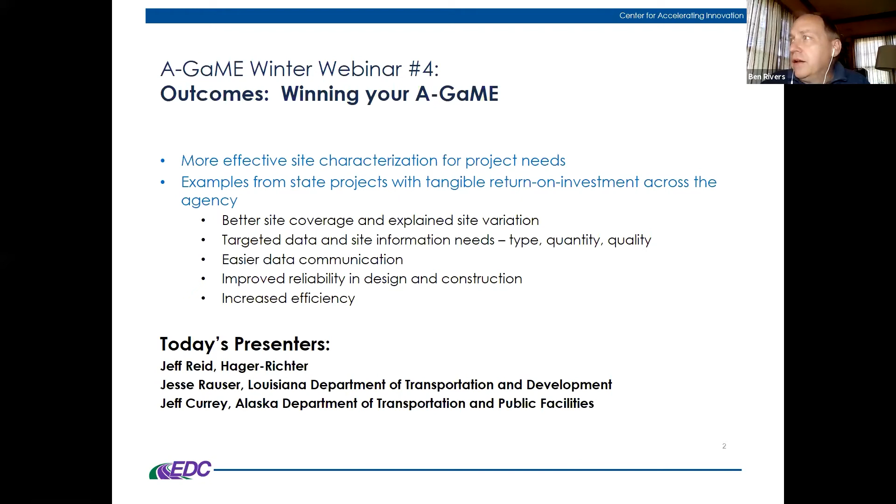Jeff Reid is a geophysicist with Hager Richter. Mr. Reid has over 33 years of experience in the geophysical profession. He's been involved with all aspects of Hager Richter's geophysical project work since the earliest parts of the firm's history. Mr. Reid has acted as lead geophysicist and has led field crews for thousands of surface and borehole geophysical surveys and project fieldwork.

The surveys have included borehole geophysical logging, seismic refraction, reflection surveys, electrical resistivity imaging, gravity, self-potential, very low frequency electromagnetics, ground penetrating radar, magnetics, and electromagnetics. The work typically requires close coordination with engineers, owners, regulators, requiring multiple progress meetings with stakeholders.

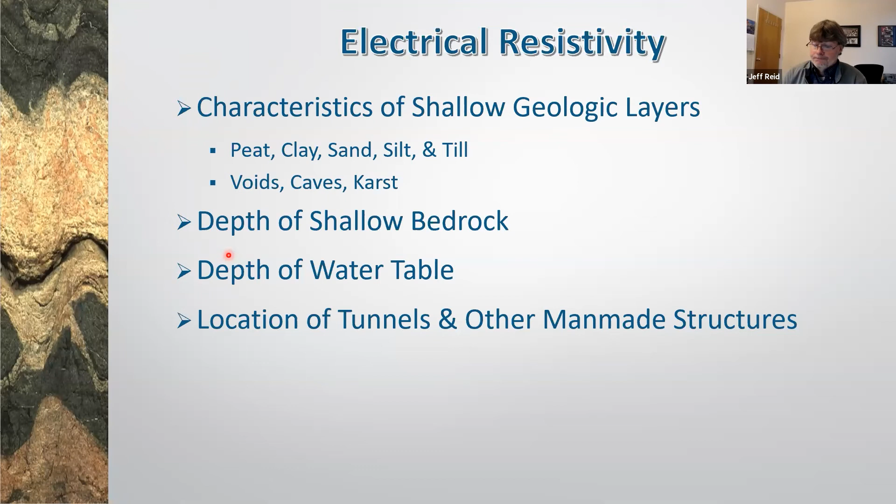Limitations of the method. I think it's very important to understand what the limitations are of each of the methods so that it is used appropriately and in the right site conditions.

Surface conditions can significantly limit the effectiveness of electrical resistivity. Water, snow, ice, vegetation, and uneven ground surfaces can impact the quality of the data and impact where you can acquire data. Subsurface conductive utilities impact the quality of the data. If you are too close to subsurface utilities, you can essentially short circuit the system, and the information you try to use for your interpretation is invalid.

The method relies on contrast in electrical resistivity between your medium and your target. If you have a strong contrast, detection is relatively straightforward. If you have a very weak contrast, detection is difficult. A good example would be trying to identify a very highly resistive bedrock underneath a relatively conductive clay. It's relatively easy to do. Trying to identify a boulder within a dry sand, there's very little contrast between the two, and therefore detection is difficult.

One key with geophysics: detection is not identification. We can detect a lot of features. We cannot necessarily identify what the features are. If we do not have ground control or ground truth through borings, then it's strictly a coarse interpretation. That's why geophysics is typically used to fill in data gaps between borings rather than on its own. It can significantly extend your point data.

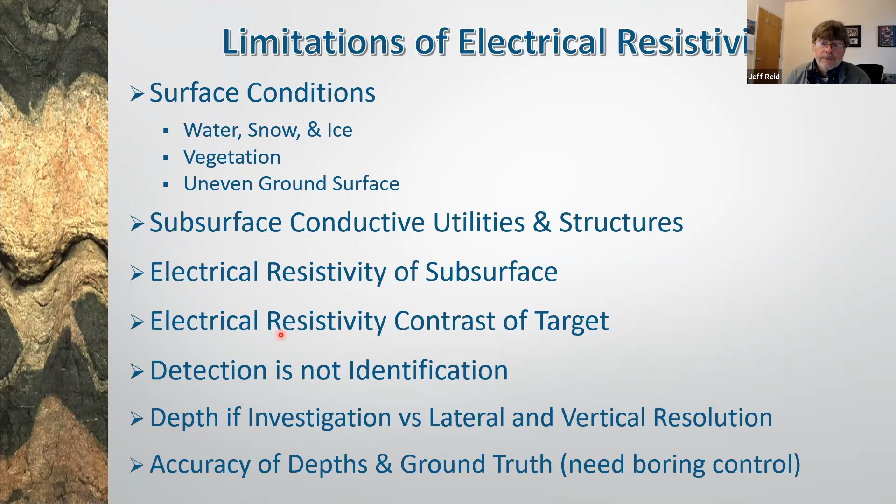Seismic methods: seismic refraction. There are specialized methods: MASW, refraction microtremor, and horizontal to vertical ratio. And borehole methods: parallel seismic and crosshole seismic. For this presentation, I'm only going to discuss refraction, traditional and tomography, and the H/V for the specialized methods. There'll be two webinars next week that will address both seismic methods and electrical methods, so you can get a much more in-depth discussion of those next week.

Seismic refraction is the industry standard for determining the depth and configuration of the bedrock surface. It's the most widely used, and it is the most effective way to do it. You also determine the velocity of the bedrock for rippability surveys, depth of overburden layer interfaces such as till or water table, the velocity of the overburden materials, that's compression wave velocity, and again, depth of water table.

Limitations for refraction: surface obstructions are again a limitation. You need to have access to the area where the data are to be acquired. Ambient seismic noise is a significant limitation, especially for transportation-related projects. There are vehicles, subsurface noise from tunnels, from other structures, from bridge piers that transmit signal down into the ground. These all impact the quality of the seismic refraction data, and we have to find ways around them. Typically, we would work off hours, or you'd have restricted traffic. You try to limit ambient noise so that the noise we're generating for the acquisition is dominant.

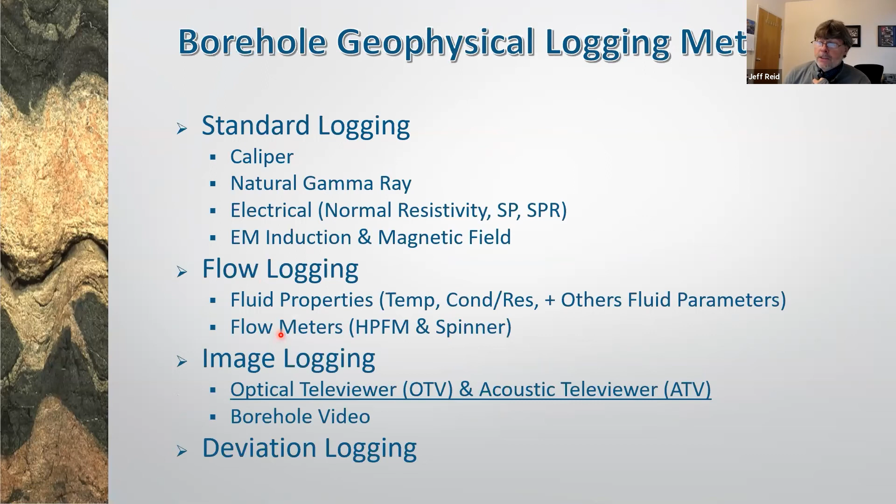ATV and OTV, as they're known, acoustic and optical televiewer logging, are used widely for rock slope stability surveys, for determining the depth and orientations of bedrock fractures, foliations, bedding, your fracture aperture, and changes in lithology in the boring. You're physically imaging the in-situ borehole wall. It's also used for inspection of subsurface structures, quality of concrete, bedrock or concrete, whatever interface you're mating with. It can give you a very good image of that contact, that interface.

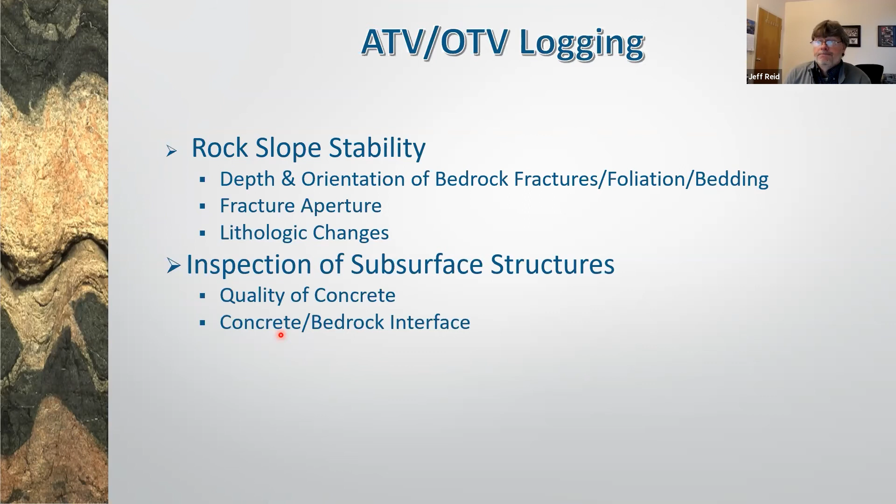Limitations. Obviously, it's a borehole tool that requires an open borehole. For ATV and OTV logging, centralization is key, so we require at least a 3-inch diameter open borehole. ATV can only be acquired in the fluid-filled portion of a borehole. The fluid does not have to be optically clear. It doesn't have to be water. It can be a slurry. It could be oil. It could be water. It doesn't matter. It just has to be in a fluid.

OTV, on the other hand, requires optically clear fluid or an air-filled borehole for acquisition. We always acquire both ATV and OTV because they often complement each other. There may be portions of the borehole that are dry where you can't get acoustic televiewer data. You have the optical data, or you have optically clear fluid for a portion of the borehole and not for the rest of the hole, so the ATV data will take over for that. And you'll see some examples for that as well.

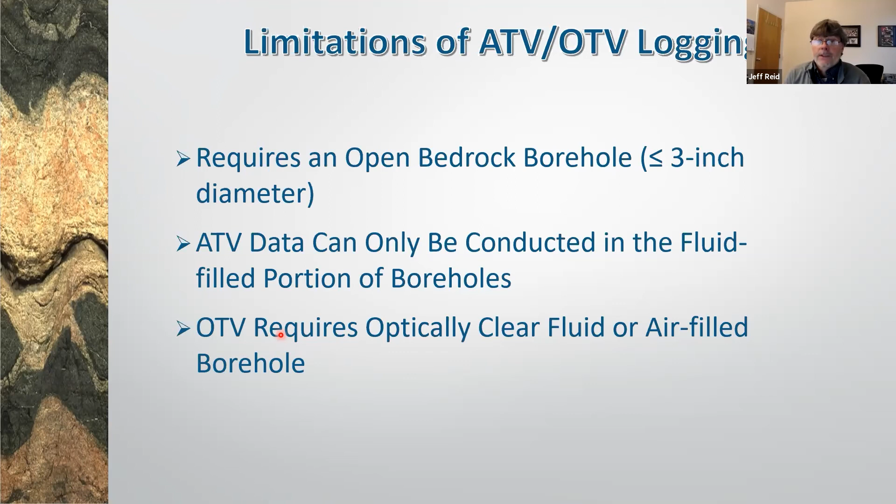By measuring the amplitude or the width of the sinusoid, you get the dip of the anomaly, and by looking at either the peak or the trough location, it gives you the orientation of the plane. The optical and acoustic televiewers have deviation probes built within them so that we know the true orientation of the cylinder. A vertical hole is never vertical. There's always deviation, and it uses that data to properly correct the sinusoidal waves so that we're getting true dip and dip azimuth of the plane as it passes through the borehole.

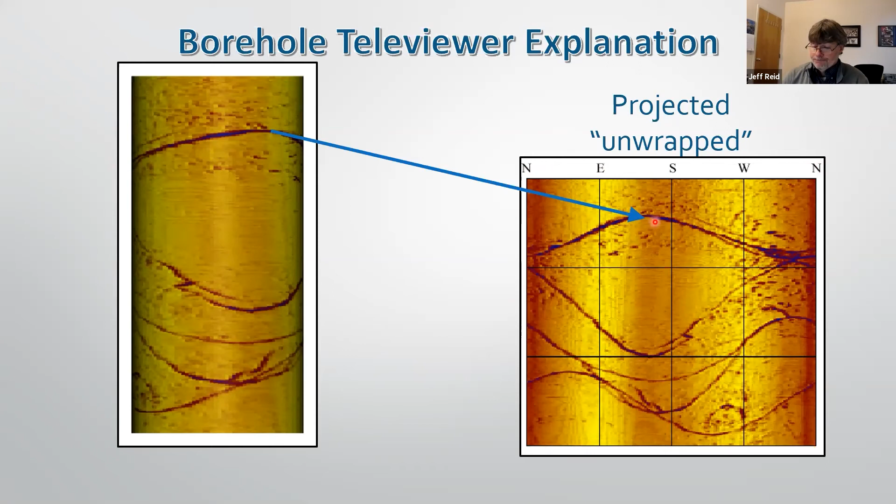Okay, now I've got 3 case studies to go over with you. The first case study is a bridge replacement project in Massachusetts. This was done for the MassDOT bridge program and its representatives. The objectives of the survey were to determine the depth and configuration of the bedrock surface, both at the approaches for the new bridge and in the river for the actual span itself.

They needed wave velocities for soil and bedrock for seismic design, and evaluation of the river floor for the presence of obstruction to construction along the possible alignments. So geophysics here was brought in very early in the project, in the planning stage, even before actual design.

So you're getting the best bang for your buck, the most value, because you're allowing yourself to use the data to actually get yourself to a design stage with more information than you normally would, rather than coming up with a design and then looking at the geophysics to try and confirm it.

The methods that were used in this case were seismic refraction for the land, seismic reflection in the water, bathymetry, side-scan sonar, and magnetics, and passive shear wave velocity testing at the locations of the planned abutments for seismic design. We conducted the land portion of the seismic and the passive shear wave, and we worked with E4 Sciences, who actually acquired the seismic reflection and bathymetry and side-scan sonar.

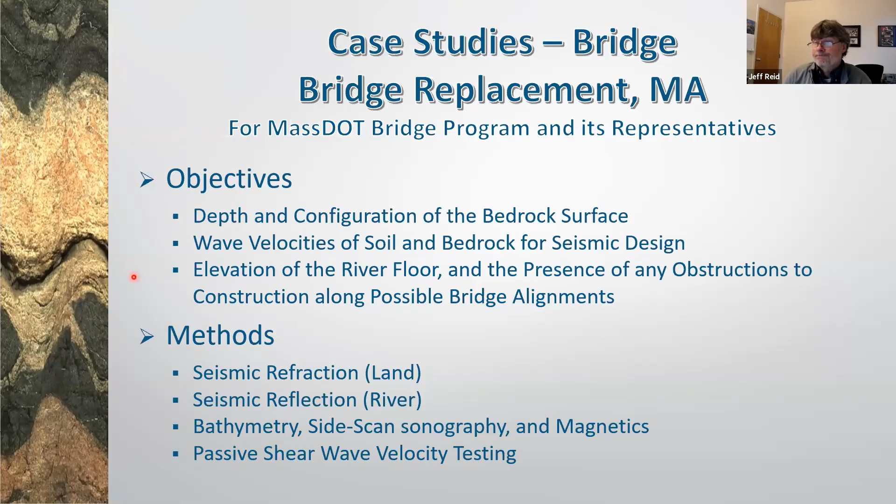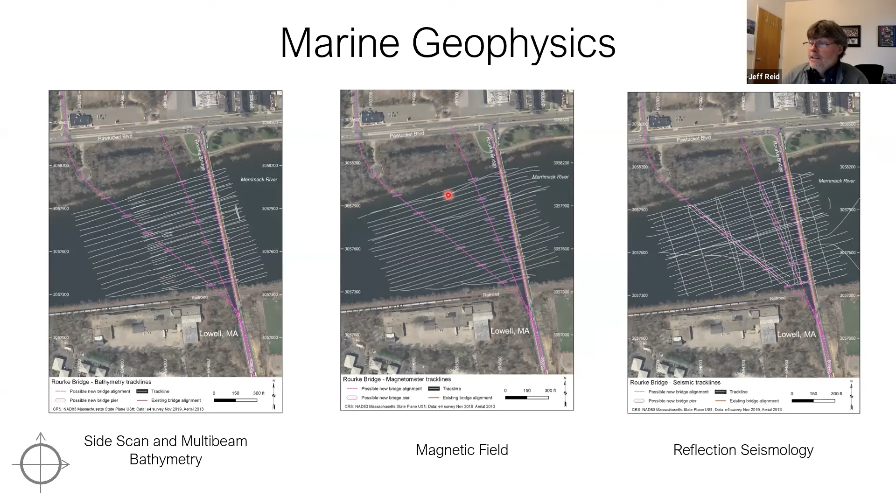This shows basically the data paths for the water-based geophysics or marine geophysics. Each of these are the different scans that were acquired from boats within the river for the side scan, the magnetics, and the reflection seismology. This is a resulting river floor map based on bathymetry and side-scan sonar. These purple lines show the 3 possible bridge paths that the DOT was assessing for the alignments.

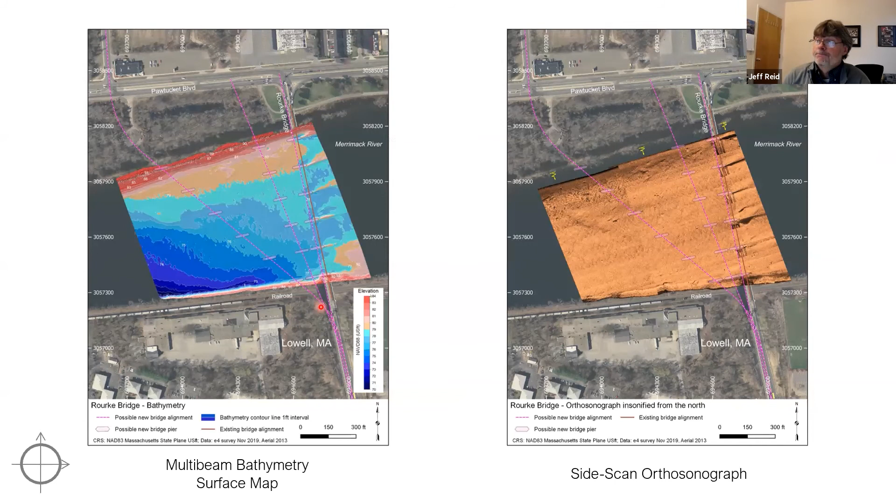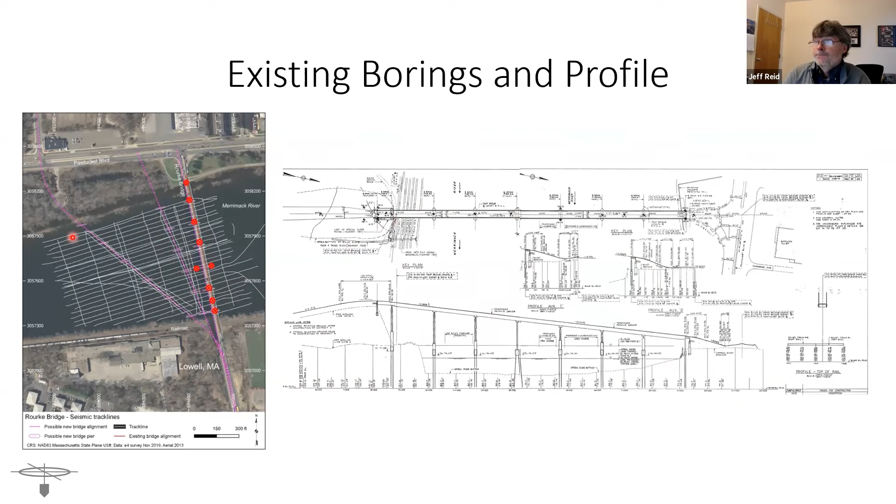The existing bridge was a temporary bridge, it's been there about 40 years, and it's finally being replaced. So we did have some information from the existing installation. The data for those borings were used for calibration, and then that data were extended to the rest of the interpretation, extending that information away from the existing borings by using the geophysics.

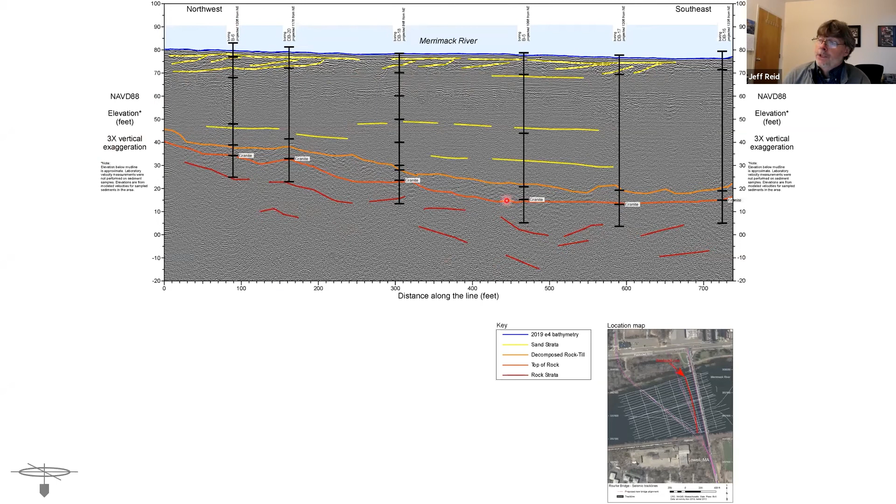This is an example of one of the seismic reflection profiles. You've got the river floor here. You've got mud and other material up above, a till layer, and then the hard granite below that, and even some fracturing within the granite. And these were the borings provided by DOT that were used for calibration and then extended out.

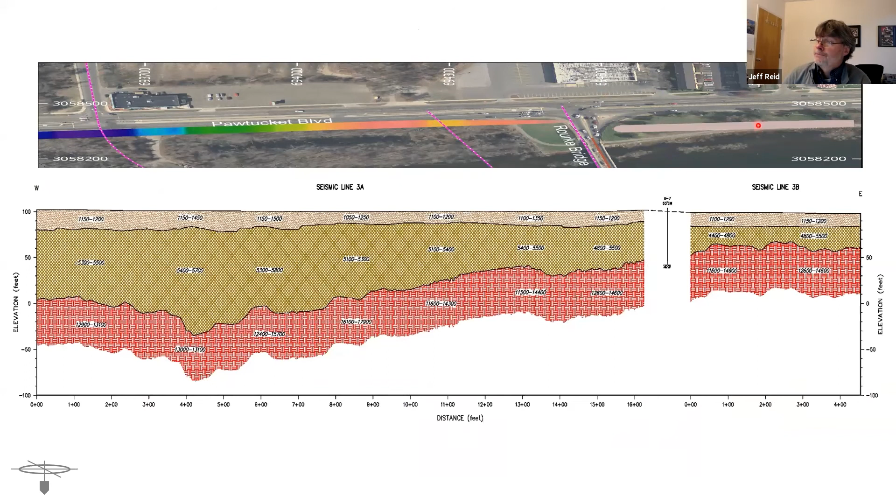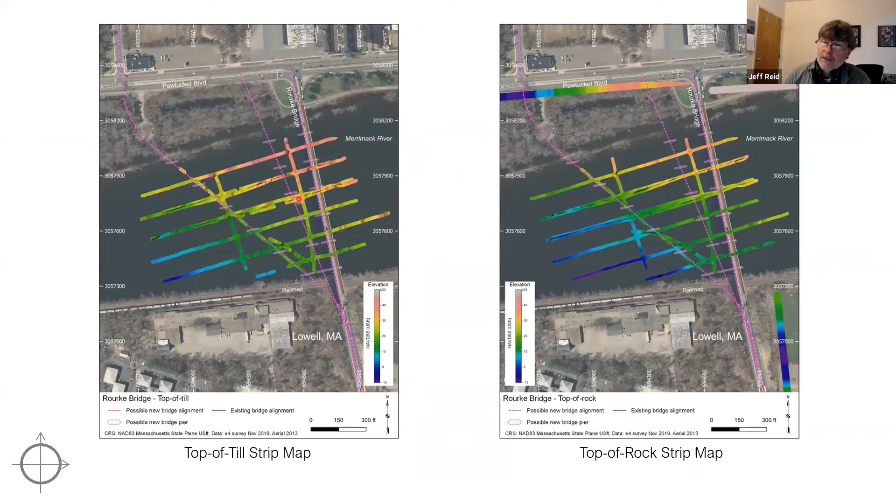And by taking both the surface and water-based geophysics and the depth of bedrock, and in the water portion at least the depth of till, you're able to generate bedrock contour maps. This is a till contour map. This is a bedrock contour map, which helps choose which alignment is most appropriate and most cost-effective for the new bridge.

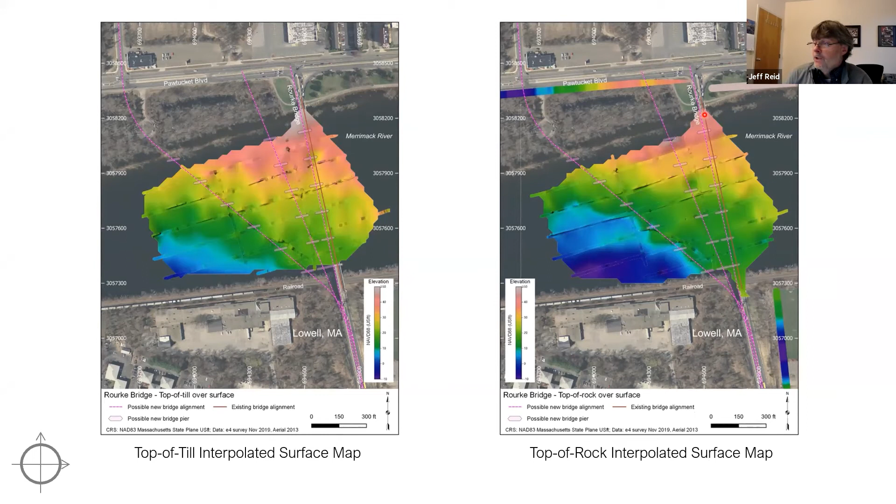Second case study, this is a slope failure on Pennsylvania State Road 87, which is in north central Pennsylvania. This was for PennDOT District 3 and its representatives. The objective of the surveys was to determine the depth and configuration of the bedrock surface, both above the existing roadway and below the existing roadway where the slope mitigation was going to happen, and to detect a possible bedrock shear zone that bisects the failed slope based on observations from outcrops and topography above the existing roadway.

This roadway experienced significant settling and failure after a couple of very heavy rain events a few years back. The existing drainage was working adequately, but it was clear that water was actually moving under the roadway rather than through the drainage system as originally designed. The geophysical survey consisted of seismic refraction tomography, standard seismic as well, and electrical resistivity imaging.

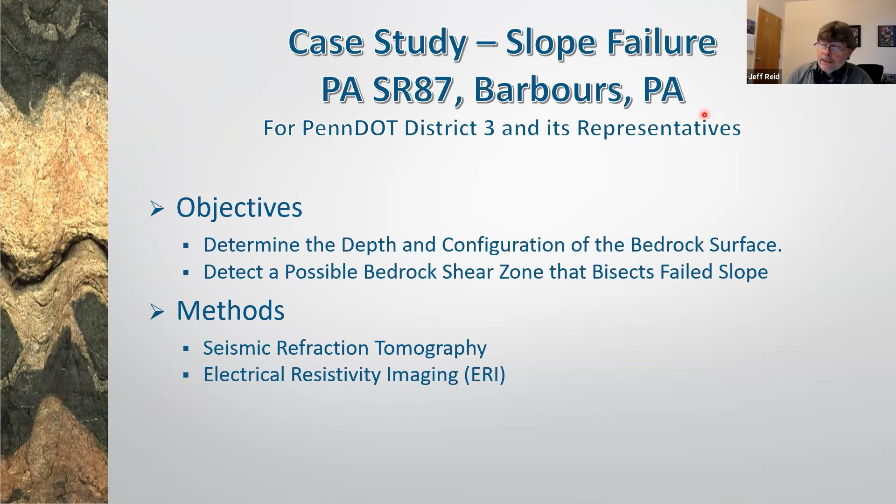Here's the site. So this is a rather large hillside here. You've got a brook down below, so you've got all the water moving under the roadway in this location. It's a site plan. So this is the higher side, this is the lower side, the stream would be down below. And you've got resistivity and seismic refraction along this line, and just seismic refraction along the bottom side. We could not run electrical resistivity down here due to pieces of guardrail and other utilities that would have impacted the quality of the data.

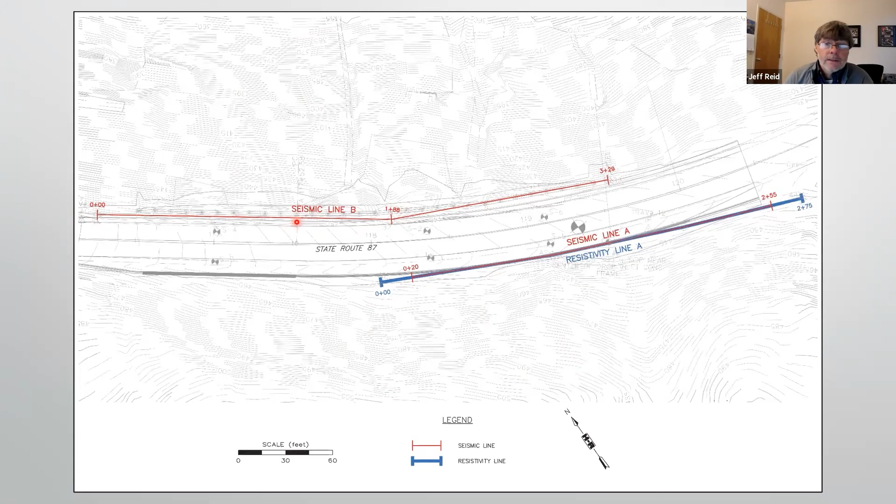Here's a picture of the roadway. So we've got the electrical resistivity imaging set out in this case, the electrodes in the ground here. And you can see the failure on the opposite side of the road here. And this is a view. You can actually see the anticipated shear zone, and there are outcrops up here that were mapped by the geotechnical consultant we were working for and indicated there possibly is a shear zone in this low area. So the electrical resistivity line was actually centered on that feature.

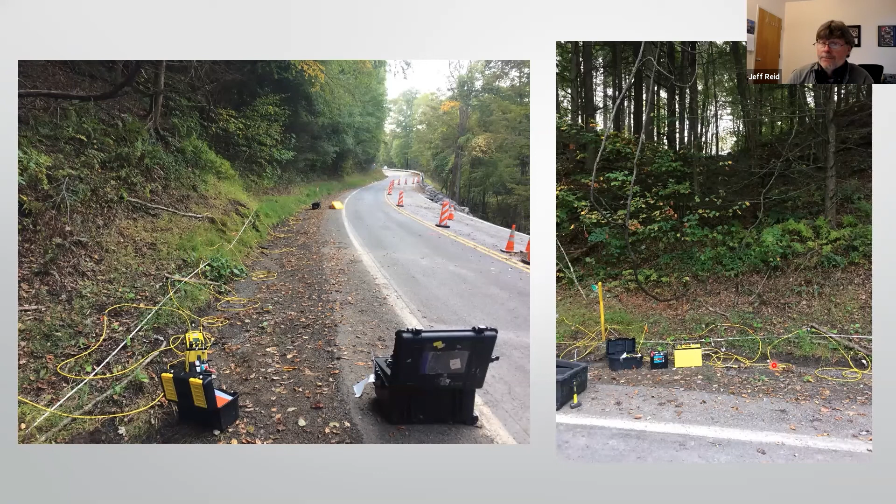This is a surface seismic refraction tomogram. It's tomography. So the varying colors indicate changes in velocity in the subsurface. Blue colors are low velocity, reds and purple colors are high velocity.

The lower plot is the resistivity image. Greens and blues are low resistivity, meaning conductive features. And reds and yellows are high resistivity, meaning resistive features. This particular line was centered on the location of the possible shear zone, which was located off center from this catch basin. They had clay and PVC pipes extending out from the catch basins. They don't negatively impact the data.

Very low resistivity feature just above bedrock on the side of the road. And this is the tomogram. You don't get a significant feature here, but you do get a dip in the bedrock surface and a slight change in the resistivity. I'm sorry, in the compression wave velocity of the bedrock.

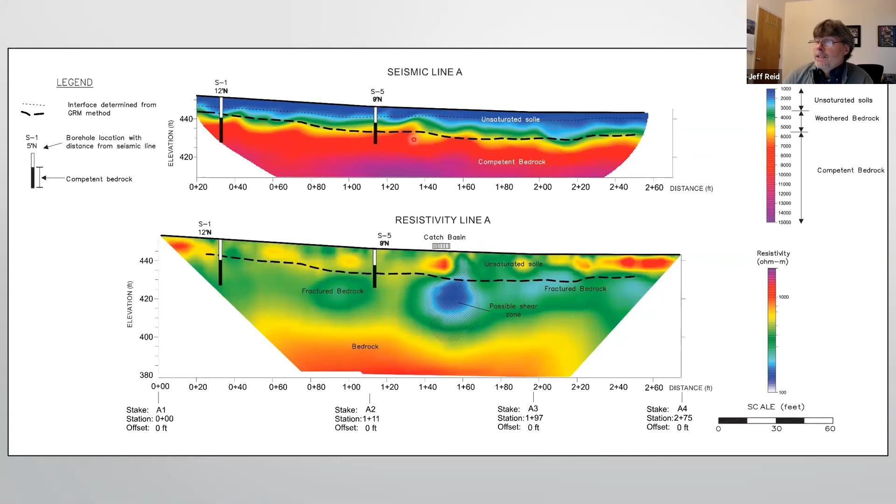This is the view of the seismic refraction on the opposite side of the road. So the refraction lines were actually run in segments that came down in the slope below it. And this is a view of some of the bedrock, very shallow bedrock, which would have been up in this area over here.

And again, this is a seismic refraction tomography. The dashed line on here actually is a standard refraction interpretation. It's called the generalized reciprocal method. So it's a layered interpretation versus a tomogram, which allows you to image and process it as a continuing change in velocity versus depth. The two match very well. And these are the boring logs that indicate depth to rock. And again, you're extending that information between the two models.

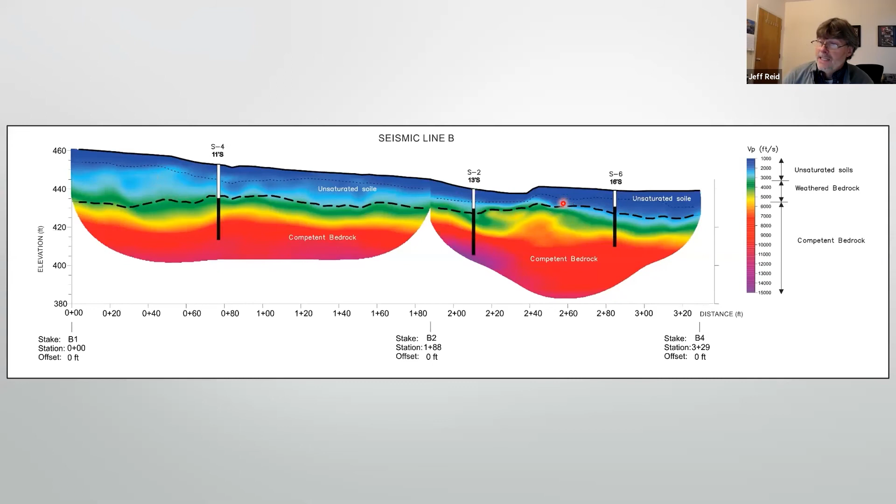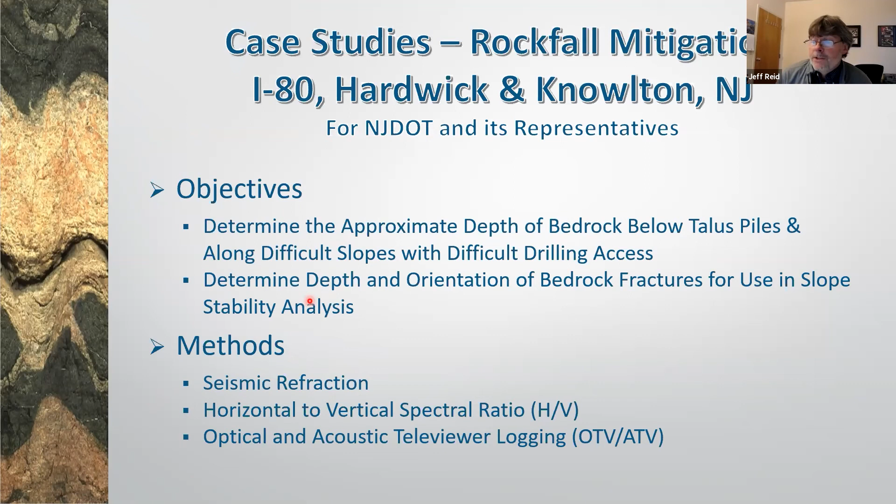Last study. This is a rockfall mitigation project on Interstate 80 in Hardwick, Knowlton, New Jersey. The objectives of the geophysical survey were to determine the approximate depth of bedrock below talus piles and along difficult slopes where drilling was very difficult. You'll see, it'll become obvious in a moment. And to determine the depth and orientation of bedrock fractures for use in the slope stability analysis. So here we use seismic refraction, horizontal to vertical spectral ratio, and optical and acoustic televiewer logging.

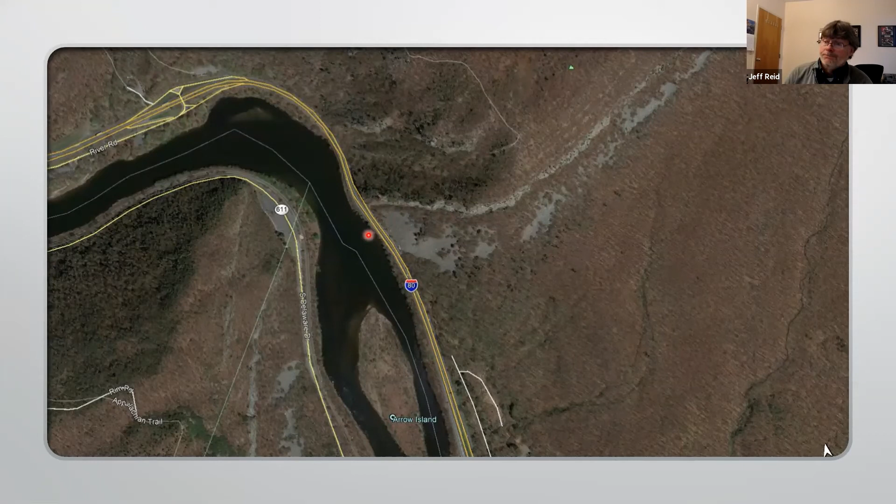Site's located very close to the New Jersey-Pennsylvania border on I-80. There's a significant rock outcrop that occurs right along in here. It extends along the roadway with a significant talus pile below it where rock is coming down off of it. So they're trying to design a mitigation system for these rock falls. This is a view looking to the east from the slope. This huge talus pile from the rock falling from above.

These are the areas where we use the H/V, where it's pretty clear that drilling is not possible, and conventional seismic refraction is not possible in areas with steep, hard talus like this. We did run refraction in the wood lines where we had soil infilling around the talus, where we could acquire good quality data. Obviously, noise is a significant issue when you're working along an interstate highway, and most of the work was done in off hours and at night, and actually with traffic minimized to a single lane to slow it and minimize noise impact to our data.

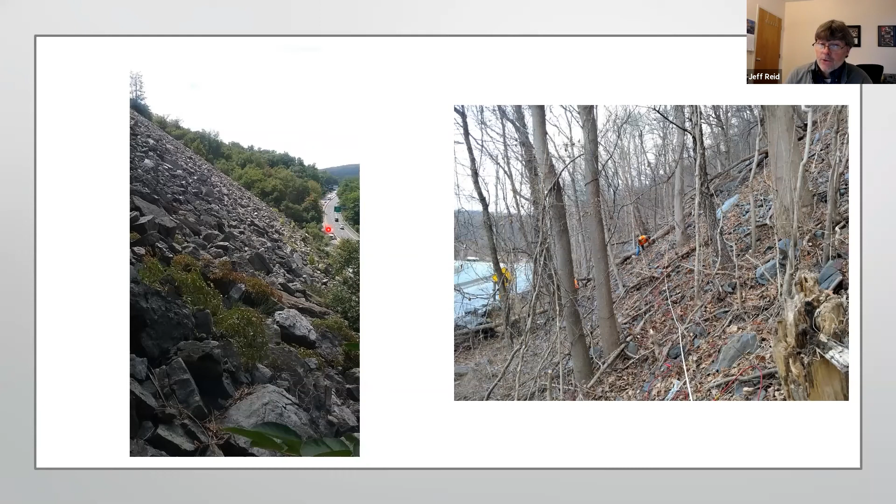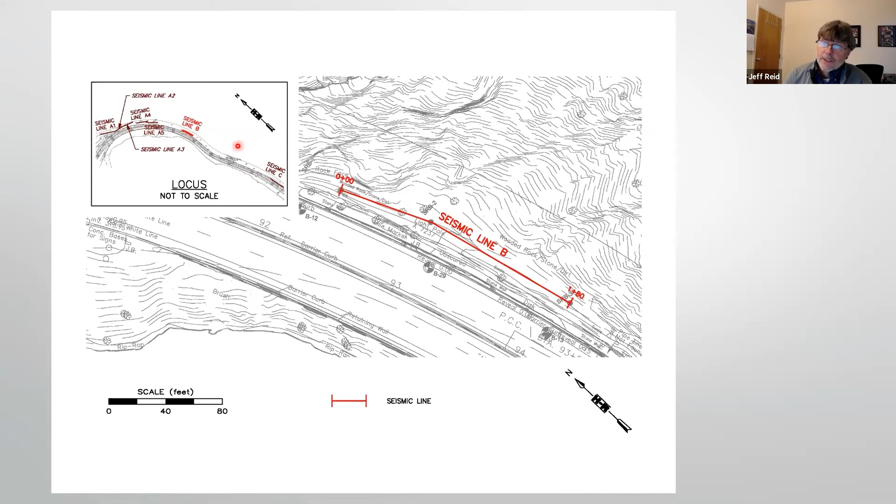This is a blow up of one of the sections. Again, just seismic refraction along areas where we could have access to it. And you can see in the scaled out view, there's significant distance between those lines where we couldn't acquire data. That's where the talus existed, and that's where we did acquire H/V data. Again, very similar to the last profile that we presented. In this case, only GRM, or only a layered interpretation. Simple unsaturated soils over competent bedrock. But this profile then can be used to help design footings for the mitigation.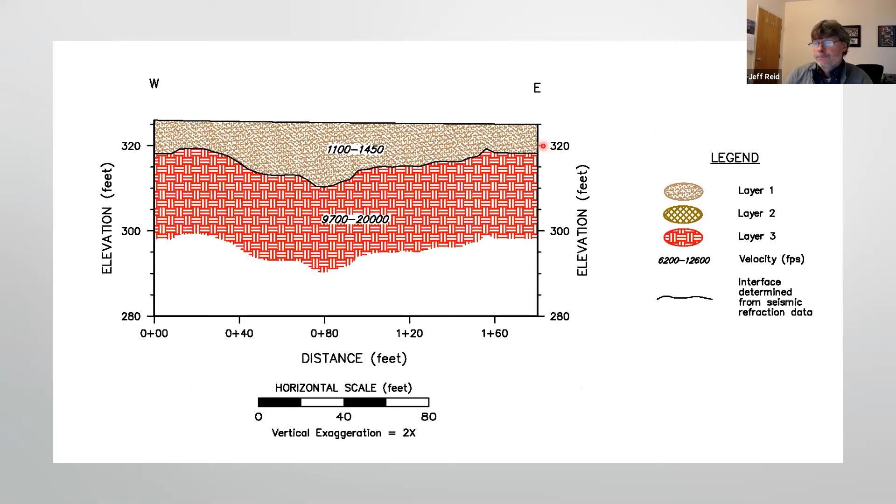In addition, we acquired the H/V, which is about the size of a small shoebox. It gets set down and records data for about 17 to 20 minutes, both the horizontal and vertical components of the seismic waves. We use an inversion scheme to then look at that data and determine a bedrock depth based on the ratio of the two forms of the seismic waves. And it gives us an estimate of the overburden thickness at that location.

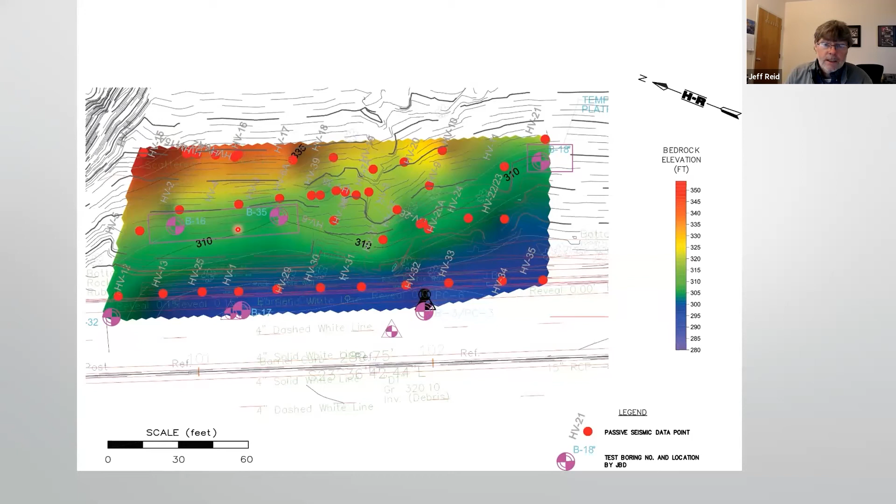In this case, we did it at 44 different locations along the talus pile, and also acquired it at locations where we had known depths of bedrock to calibrate the ratio that we're seeing, and then you apply that equation across all of the data points to generate a bedrock topography map for the area under the talus pile. There's no other way you could generate this without extreme cost for drilling. They did put in some of the borings, as I showed you on the last plot, but you could see how they had to basically build platforms into the talus pile for supporting the drill rig.

We went and acquired acoustic and optical televiewer in all of the boreholes that were installed here. In most cases, we had the equipment hauled up to the top. It's a little hard to carry it up.

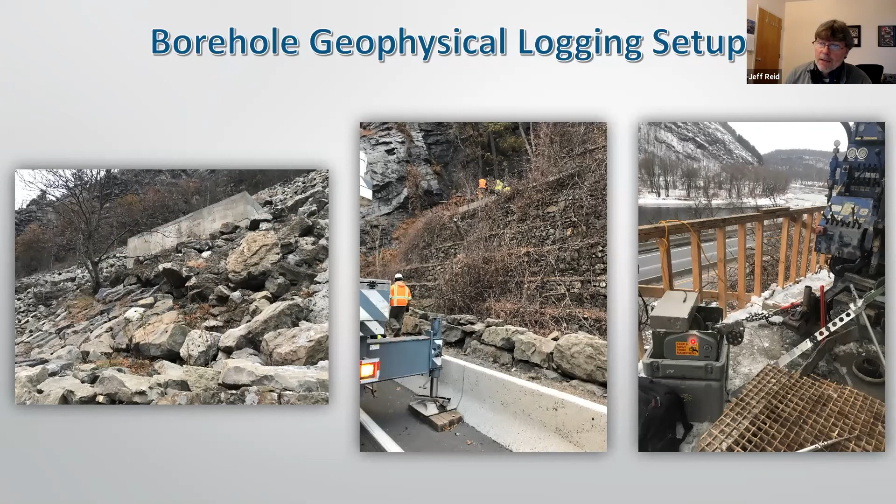And see, these are some of the geophysical borehole logs. So again, you've got the optical televiewer log here. You've got the acoustic amplitude plot here. And you've got the acoustic travel time plot here. This is the caliper plot generated from the acoustic travel time, so it gives you the borehole diameter.

Tadpole structure plots are provided on top of the image. So each one of these individual features is categorized by its fracture rank. Fracture rank 1 would be partially connected around the borehole with no aperture. Fracture rank 2 completely wraps around the borehole, but with minimal aperture. And then fracture rank 3 and 4 both have aperture. Fracture rank 4 has significant aperture.

Then the rewrapped cores here as well. You can see the bottom of the casing in the optical image is set into the rock. In this particular case, the casing was supposed to be extended down to 9 feet. It was over drilled to provide access to the casing to get it down to this position. But you can see the casing got trapped above it, and there's actually a significant gap in the rock above that. Quite often that can pose significant issues for collapsing of the borehole.

And you can decipher in these large zones many significant fractures. The cores for these particular holes were basically coming up in very small chunks. You could imagine that the RQD was poor, as was the recovery. So trying to get an accurate image of the fracture statistics from a core for this site is very difficult. But when you're dealing with an in situ borehole wall, you've removed all of the ambiguity from mechanical versus natural fractures that you'd have in a core, because you are simply looking at the borehole wall.

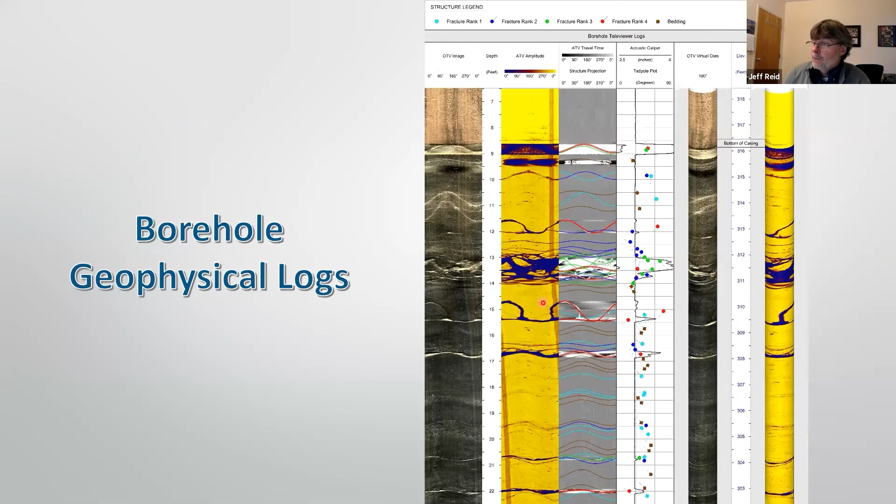That's it from me. So I'm going to hand it back over to Ben, and he can take it from here. Good. Thank you very much, Jeff. That's an awesome presentation. And a great example of a difficult condition where certainly this geophysics fits the bill, in conditions where you just can't drill anywhere. Great example of that. So very good.

So I will let Jesse share his screen while I introduce Jesse Rouser. Jesse is the Assistant Geotechnical Administrator for Louisiana DOTD Geotechnical Group. He has worked with the department for about 10 years and worked in the private sector before that for about 8 years. He graduated from Louisiana State University in 2003 with his bachelor's in civil engineering, and in 2008 he received his master's in geotechnical engineering. His interests include deep foundation design, testing, and data management. With that, Jesse, I'll let you take the floor.

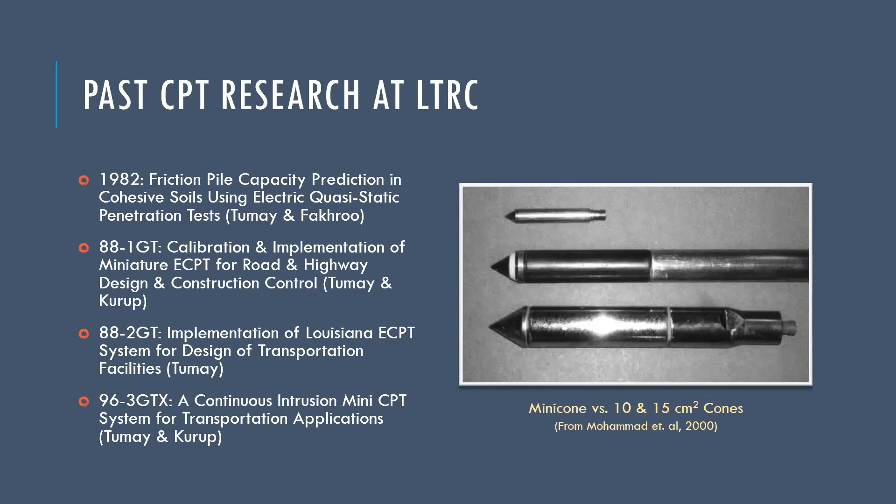And then in the late 80s, Dr. Zhang and Tumay had a research project where they looked at an alternative statistical approach to classifying soils using CPT. Instead of breaking things up into different soil behavior types, it basically split everything into 3 categories, and it was more of a statistical type of approach. So it looked into what's the probability that we have clay, silt, or sand.

And then later on in the 90s, Titi and Abu-Farsakh researched some of the direct pile design methods that were out there. These are methods where you're not converting CPT into intermediate steps. You're basically just using these methods to estimate pile resistance directly from the CPT data. They looked at 8 different methods, and they ended up picking the best 4 for the data set that we had here for Louisiana soils.

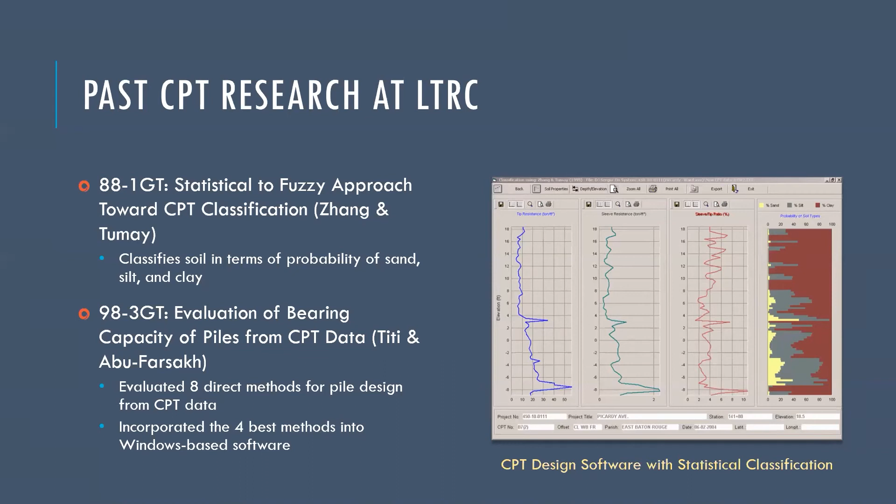Those 4 best methods, along with that statistical classification methodology, were incorporated into a Windows software that could be used to estimate pile resistances. The image here on this slide is just a screenshot from that software, which is kind of the main interface that we use.

After all that research in the 80s and 90s, LTRC transferred their cone rig over to the Geotech group here at DOTD. There wasn't a whole lot of CPT research done after that I'm aware of, but the rig was used here in our group for production work. From what I understand, in general, we didn't really have a section-wide push to use the cone, but certain engineers would use it on their project if it was a personal preference or for very specific applications. And when I came here in 2011, we were mainly using the cone rig to obtain design data for interstate median cable barriers, because we could go out and get a lot of data real quick.

And some of our consultants were still using the LTRC pile design software on their respective LADOTD projects. That software kind of gave us a standardized pile design methodology, sort of like the FHWA DRIVEN. One issue with the software is that it doesn't really take overburden changes into account. Being that most of our projects are bridges with scour concerns, it kind of limited its usage to some degree.

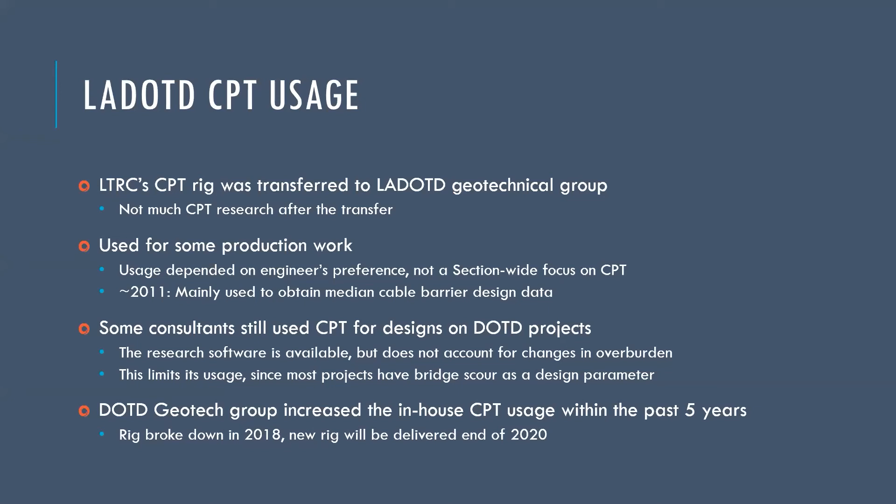I would say within the past 5 years or so, we've tried to increase the use of the in-house rig. But as we started to ramp up, our rig broke down, and it's been down, I think, since about 2018 or early 2019. But we hope to have a new rig delivered here by the end of the year, so we can pick up where we left off and push on with CPT usage.

The project will eventually connect Golden Meadow to Port Fourchon and the LOOP oil facilities with a highway that won't be submerged during major hurricanes. Phase 1 of the project was the southern portion, which consisted of about 8 miles of elevated highway connectors to the existing LA1 that's at grade, and a high-level bridge over Bayou Lafourche. We finished the construction on that in about 2011. And we're right now wrapping up the design on phase 2 that will take things northward to the protection levee in Golden Meadow. Phases 3 and 4 are long-term projects that will ultimately double the capacity of phases 1 and 2.

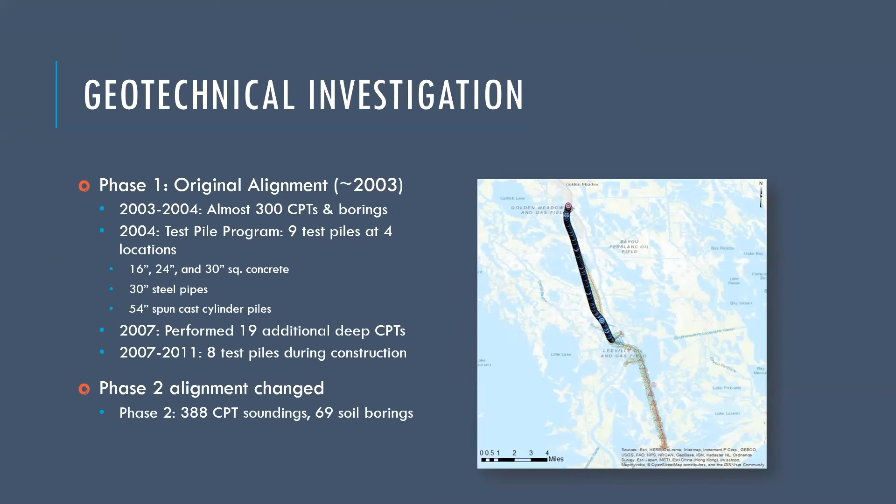And so between 2007 and 2011, we constructed the southern portion of the project, and we tested an additional 8 test piles as part of the ongoing construction. And during all this, at some point, the phase 2 alignment shifted. And so we had to put together an entirely new geotechnical investigation for the northern portion. And that one consisted of about 388 CPTs and 69 soil borings.

The soil profile on the site consists of peat, normally consolidated clay, and some intermittent sand layers. The piles for phase 1 were designed using borings and the FHWA Driven software, but we did look into the direct CPT methods, but I wouldn't say we heavily used those for the design. This was all pre-LRFD. We used a factor of safety of 2, and then we tested 1 pile on each bent. And then for phase 1, ultimately, we tested about 500 monitor piles and used CAPWAP signal matching for all the pile acceptance.

So the reason I'm telling you all this stuff about soil profiles and test piles for a presentation about A-GaME is that for phase 2, we wanted to know, do we have enough data and confidence to design hundreds of pile bents using just the direct CPT methods. And keep in mind, a lot of these soils are really soft, they're difficult to test. So the cone is probably at least a more repeatable means of getting soil information if you trust the direct design methods. And we did a lot more dense geotech investigation for phase 2, which you can kind of see here in this image.

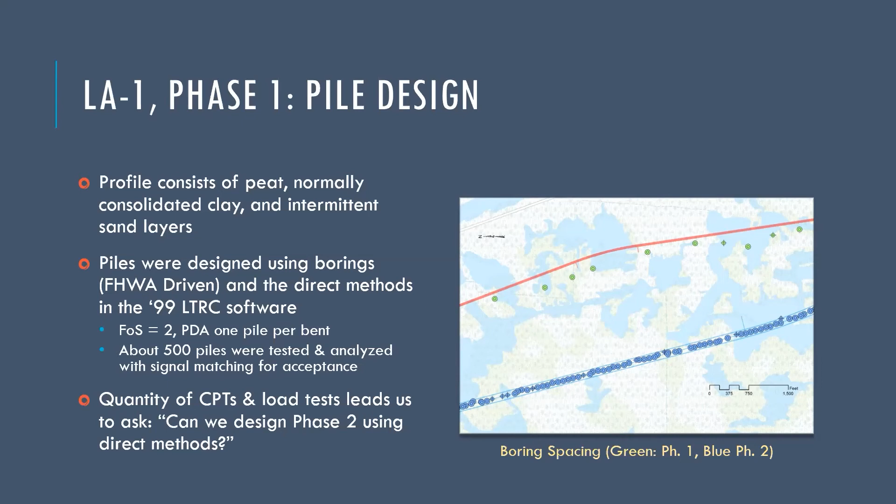It gives us the ability to pretty much have a representative CPT at every single pile bent instead of having to try to make composite soil profiles from multiple borings and multiple CPTs. And so before designing phase 2, I started comparing the results of the static load tests to the direct CPT methods. And for the comparisons, I broke things down into 3 categories. I had static load tests that were successful, in other words, where we failed the pile, load tests where the pile did not fail, and force pulse rapid testing on some of the larger 54-inch piles.

And since we sometimes had multiple CPTs near each test pile, I used the pile driving logs to try to select the most representative sounding for each location. And also because the borings and the cones were taken from airboats, there's a little uncertainty in terms of what constitutes the top elevation of each sounding. So due to the strength disparity between the sand and the clay layers, I really had to make sure that I selected a CPT sounding where the sand layers lined up pretty favorably with the increased resistance in the drive logs, because I wanted to make sure that if I'm comparing estimates from these methods, that it ends up in the correct layer.

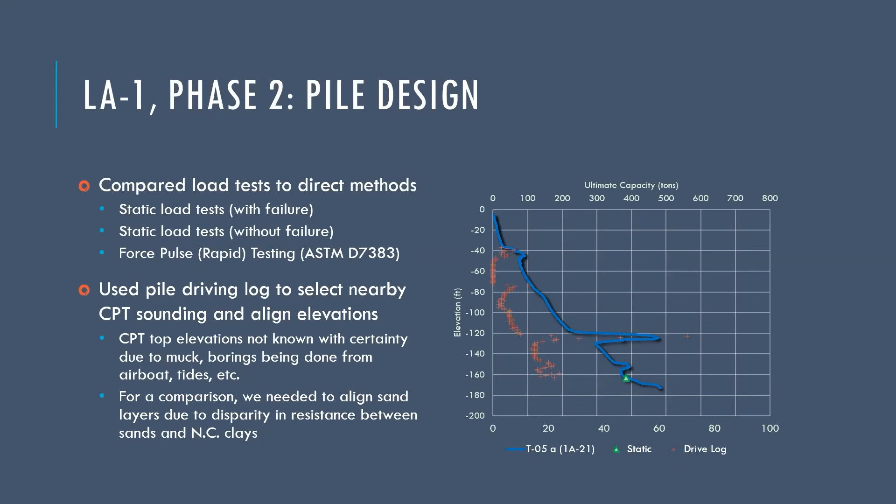And so what you're seeing in the image here is something I did probably at least once for every test pile and then for every CPT design method. The blue line is just the theoretical nominal pile resistance from the direct method. The red plus symbols are the driving resistances from the pile drive log. And the green triangle there is the failure load of the pile plotted at its tip elevation. So, in this particular case, that direct CPT method was dead on. They weren't all this good, but at least it shows that if you have enough data to do the comparisons, you can get a lot of confidence in the CPT.

So the table here is basically just a summary for those 3 categories I mentioned. And I evaluated the quality of the prediction by dividing the predicted resistance from the CPT method by the tested resistance. And what I found is that the direct methods underpredict for the force pulse rapid testing. And I don't want that to be an indictment on the test method itself, because remember, that's the only method we use for the very large 54-inch cylinders. So the design methods may also not scale well to those larger piles.

For tests that didn't exhibit a clear failure load, the CPT direct methods tended to overpredict. That's to be expected though, because that's kind of an incomplete load test. And then for the tests where we failed the pile and had a successful load test, the CPT direct methods actually provide a really good correlation with the static load test. So for our particular site, the Schmertmann method provided the closest estimates, but it provides the highest resistances in sand. And so my concern on this project was that it could overpredict our pile capacities in sand.

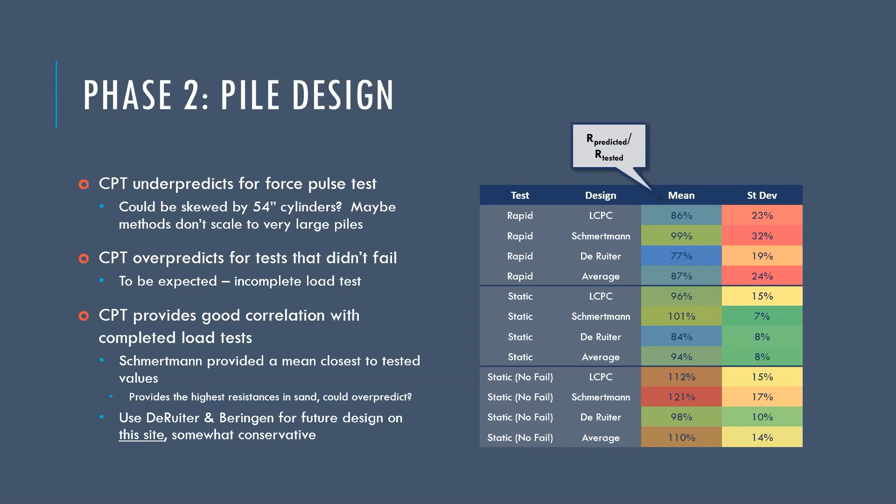So what I ended up doing was selecting the De Ruiter and Beringen method for this particular site, since it appears to be a little bit conservative, but it has a pretty low standard deviation. So kind of the moral of the story here is that we have enough geotechnical investigation and load testing to feel comfortable enough to go ahead and design the entire phase 2, which is another 8 miles, using just CPT direct design methods. And that's what I've done.

I just want to show this here. This is kind of a cool slide that shows, it's supposed to be a fence diagram of the entire phase 2 alignment. And it actually looks like geophysical testing, but all this is the result of just hundreds of CPTs just stacked up alongside of each other. But it's really cool because you can kind of see the sand layers come in and out of the profile as you progress from south to north. So I don't know how well the animation works over the internet, but I've got about 5 of these things like this.

Okay, and then next I want to talk a little bit about a project where we used CPT during construction to troubleshoot some problems. So this project is a bridge widening. It's currently under construction. We used conventional borings for design, and the profile is mainly sand. We do have a stiff to very stiff clay layer between about -35 and -65 feet. There's a good bit of scatter in the N value, so we chose a pretty conservative design profile, and we also used several indicator piles before we ordered our production piles.

And so what you're seeing here in the plot are the N values for the borings that are near the main span, which is going to be supported by 54-inch cylinder piles. So on this project, we recently drove a 54-inch spun cast indicator pile. It was supposed to have a nominal resistance of about 876 tons, but when we tested it with PDA at the end of drive, there was almost no measured resistance, and at the 24-hour restrike, we had only about 200 tons, which was a lot less than we expected. And just looking at the data, it looked like a pile driven into soft clay, so it didn't make sense.

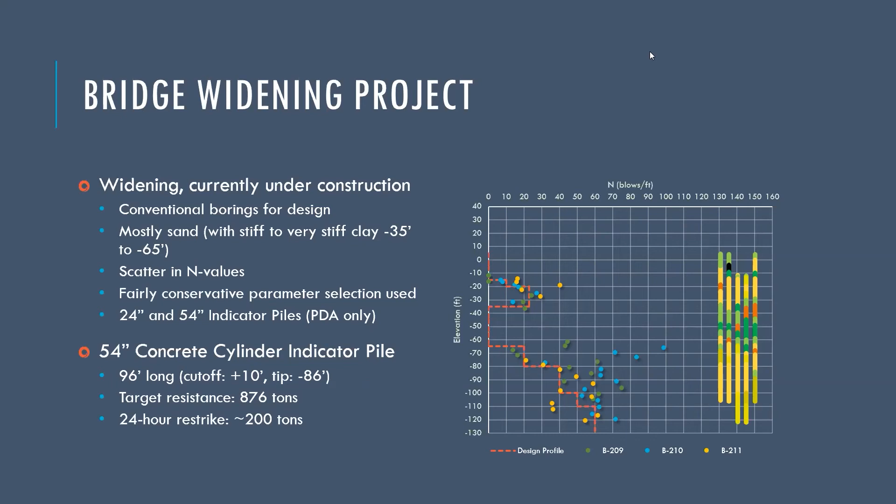So we started trying to figure out what was going on, and started trying to discuss whether we needed to redesign the piles, get a new indicator pile. What exactly were we going to do? So there's a lot of scour to deal with on this project. And so even though the pile is about 100 feet long, we only have like 42 feet of penetration below scour. And so for the indicator pile, we'll usually install a casing to the scour depth, and we'll excavate to remove the side friction in the scour zone. And we still have the overburden effect to deal with, but at least this gets us closer to our approximation of what the scour design case would look like.

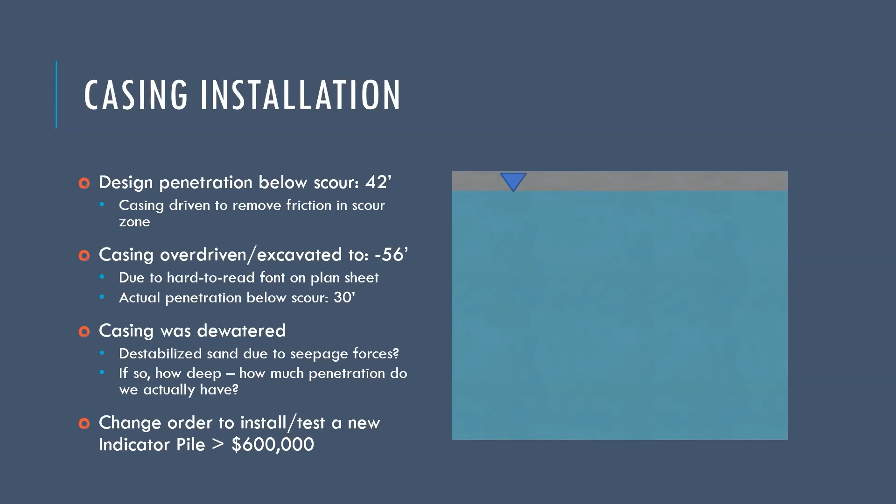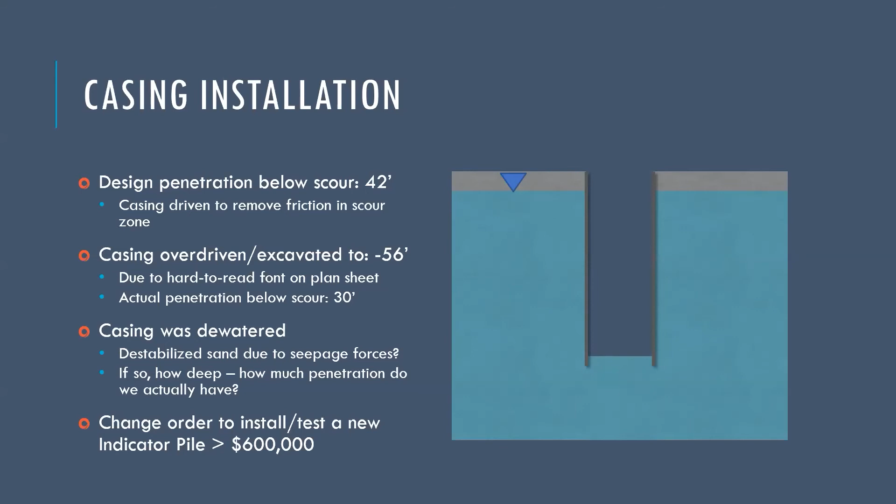And then on this project, we found out that the casing had been installed deeper than specified due to a hard to read font on one of the plan sheets. And this ended up leaving us with a penetration below scour of about 30 feet. So we lost about 25% of our design penetration on the indicator pile. Then on top of that, we eventually learned that the casing was dewatered during excavation. So if you drive a casing into sand and then they excavate and dewater it as they excavate, then you might expect that 50 or so foot of head differential could create some seepage forces at the bottom of the casing and then destabilize the soils that are down there.

And so if you drive a pile into a casing that's already too long and you've destabilized the soils below that, how much penetration do you actually have versus what you designed your pile for? And then we started looking into doing another indicator pile and having them do it correctly. And then the contractor's estimate was in excess of $600,000. So we decided to look into some other options just to see if we could avoid spending all that money on the change order.

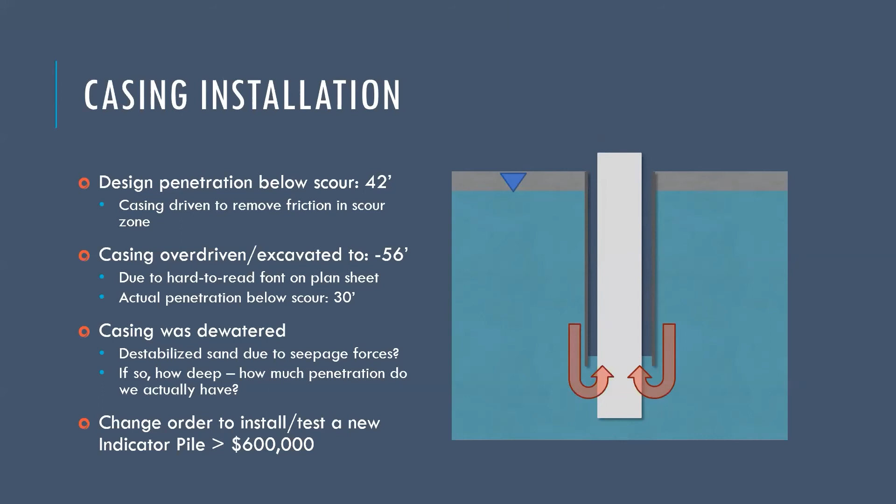So we clearly picked up the sand during the CPT testing, but the end of drive data from the indicator pile looks like it's a pile driven into soft clay. So it doesn't add up. And on top of that, our 24-inch square indicator piles achieved the resistance needed to confirm the design model. So in addition to the original soil borings, all these observations kind of tend to support the theory that the contractor eliminated too much embedment through overdriving the casing and dewatering it in a sand.

And so we kind of decided, hey, we don't want to pay him 600 grand to do another indicator pile. And due to reasons I won't even get into, we weren't able to hold them accountable for those problems. So it was going to be $600,000 of DOTD's money. But the CPTs that we did gave us confidence that the sand layer is indeed present, and it confirmed all of our other design assumptions other than what we saw on that indicator pile.

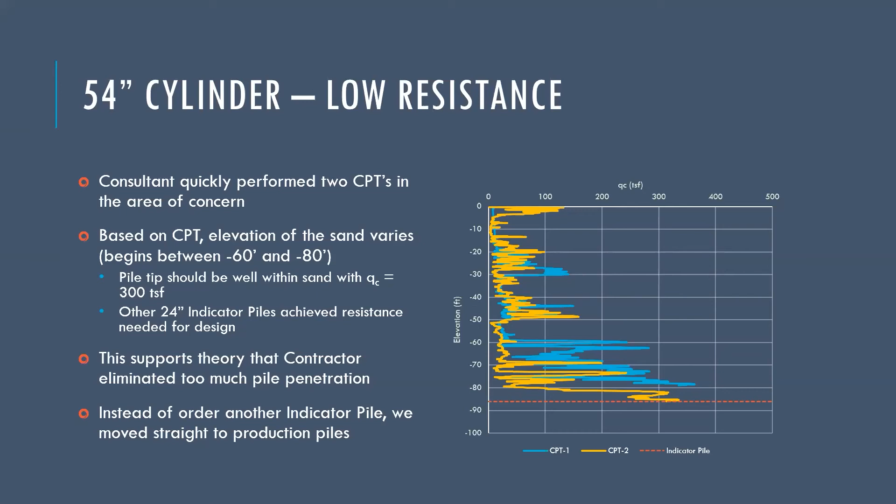And then we decided to go straight to slightly longer production piles with the understanding that we may have to cut some length off if we hit refusal. And you can ask me later if this ends up working out. We'll find out. And I just want to go into a couple of other real quick projects where we employ

CPT here at DOTD. We have an in-house maintenance crew that builds bridges, and they use H-piles and precast concrete panels. And so their projects don't exactly follow the same design and plan development process as our typical bridges. Some of these are constructed on an emergency basis. There's generally no budget or time for typical geotech investigation. So one thing we've had to do to try to help cut down on some of their uncertainty on the materials that they bring out to these sites is to perform a couple of CPTs ahead of time, give them a pile length estimate, and then verify pile resistance with the PDA.

And since we can deploy the CPT rig pretty rapidly, at least when it's working, we can adapt to the maintenance crew schedule because they don't offer a lot of lead time since they're on a totally different kind of paradigm than the bridge design guys. But we're able to help them out by doing some pretty rapid pile design using CPT.

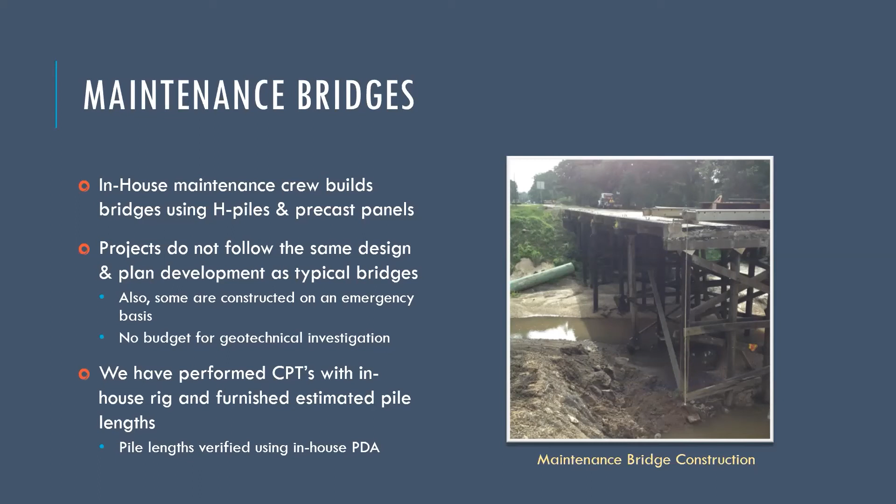We also have some bridges that have been identified as scour-critical. And so our bridge rating group has to decide whether they're going to get load posted or not. And the bridge design group, they'll go out and they'll get regular channel profile measurements just using a weighted tape. And so ultimately we can see how much pile embedment we actually have left after these scour events. And so the question that comes up is usually, do we have enough pile embedment to keep this bridge in service? So historically, we've gone up there and we've done borings and just estimated the remaining pile capacity.

But ideally, I think what we'd like to start doing is to push cones through the deck of the bridge, assuming it's safe to get on with the rig, and to do really local estimates of pile resistance right there near the bent in question. And this is kind of what we were starting to do when our rig broke down.

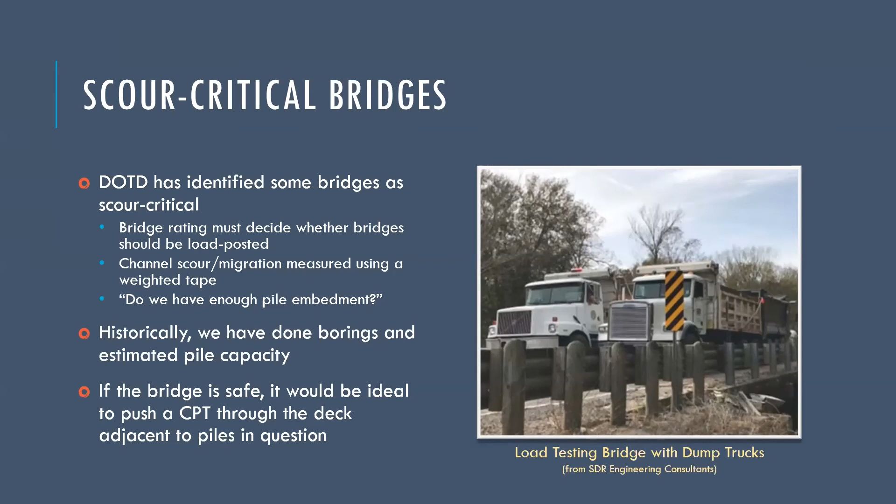We're also wrapping up a new research project that's kind of an update to the direct method evaluations that were done in the late 90s. This time LTRC looked at 22 direct methods and selected a couple of new ones that outperform some of the ones in the older software from our data set. They're also updating the software to take scour and overburden into account, which hopefully is going to increase the software's usefulness on the majority of our bridge projects.

This is one project that we'll probably revisit again and again, since sites that have both CPT soundings and failed static load tests are a little bit limited at this time. But when we do get our new cone rig at the end of this year, we'll be able to go back and push cones next to a lot of these old test piles and kind of recalibrate what we know about these direct methods.

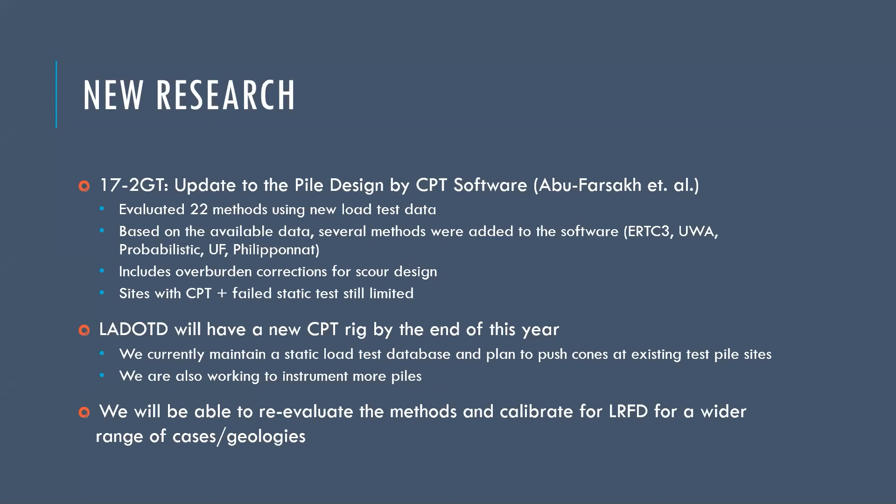Ben asked me to add a couple of slides about this, so I'm going to spend a couple minutes on this real quick. But we have another relevant project where one of our consultants, Xinping with Ardaman, built a geotechnical data explorer to kind of show off some of the soil boring data for one of their larger DOTD projects. And just to oversimplify a bit, it was mainly just a really nice looking web-based visualization tool for the lab data they had on that project.

Being that it's a web-based tool, it can theoretically allow an engineer to view that project's data from any device with a web browser without needing Excel, gINT, HoleBASE, Adobe, anything. It's all web-based. And so the image here is a screenshot showing the auto stratification tool in that piece of software and then some of the automated statistics that the app can do.

And so I worked with Xin to try to broaden the scope of the project to implement DIGGS into the web-based tool. For those of you who aren't familiar with it yet, you can go search for it, but it's basically a standard for interchange of geotechnical data. So in other words, hopefully in the pretty near future, we'll have a way to send geotechnical data files back and forth without having to worry about the source or what software it's going to be open with.

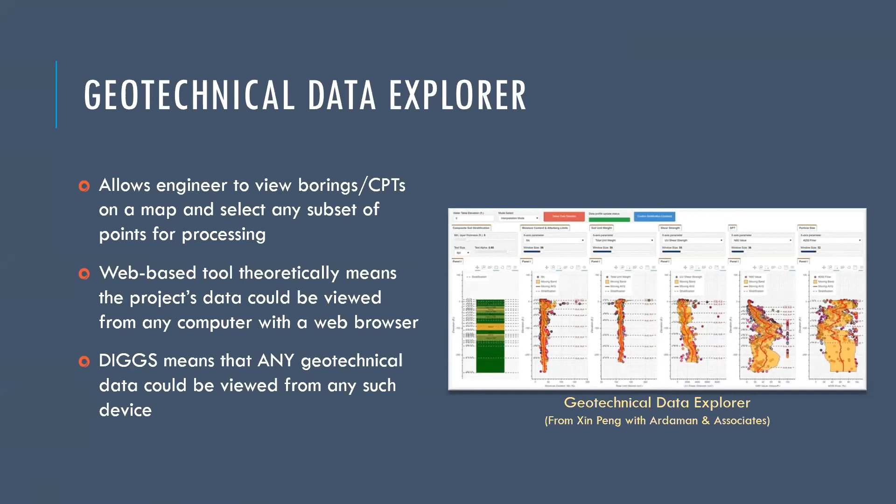And then the implication of actually working DIGGS into this geotechnical data explorer is that you'll be able to basically open a project from any project, any location, any source, and not even have to worry about what you're going to open it on. If you have a web browser, you'll be able to look at all your geotech data. And so what's cool about this is that these data standardizations and tools like the Data Explorer allow us to process larger data sets with relative ease.

And I think a lot of us probably still think about site characterization as typing boring logs into Excel so that we can plot lab tests. But if we step away from that line of thinking a little bit, these kinds of tools will let us expand our site characterization efforts and do a lot more in the same amount of time. So, you could look at things like very specific combinations of borings or data. You can ground truth your geophysical data alongside your borings and your CPTs, or even do automatic correlations or statistics just immediately once you have the data in the system.

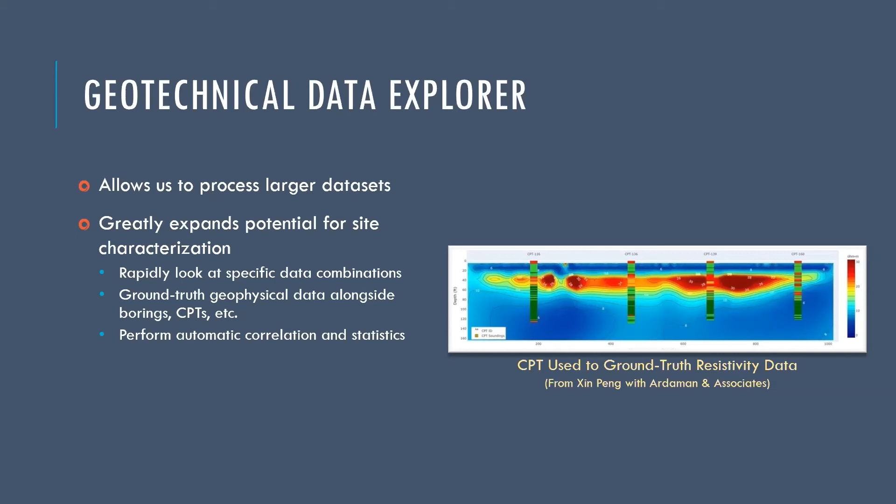And this kind of relates to CPT because I think these types of applications are perfect for fast and repeatable and efficient tests like CPT. So what you're seeing here on this slide is a screen from the software where they're using CPT to ground truth some ER data. And for very large data sets like this, you have to have this data interchange and these types of tools to be able to manage all that.

So just to conclude here, some of our current uses for CPT at DOTD are general site characterization and delineation of sand layers, pile design using direct methods, expedited troubleshooting or exploration during construction, estimating pile lengths for bridge maintenance crews, and then deriving soil properties for applications where we aren't doing direct design methods.

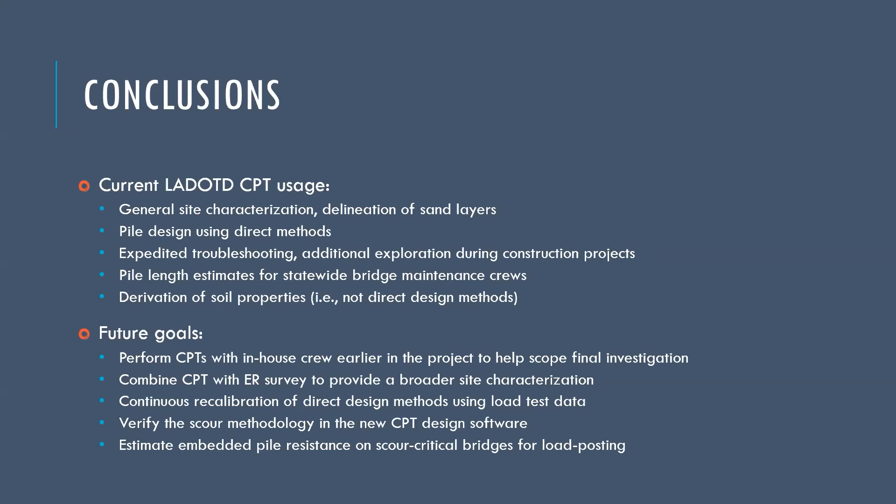Some of our future goals include performing cones with an in-house crew much earlier on projects so we can scope the final geotechnical investigation. We'd like to start being able to combine CPT with ER surveys to provide a much broader site characterization, not just for design, but for construction troubleshooting as well. And then we'd like to also be able to continuously calibrate our direct design methods using new load test data, verify the scour methodology that we just implemented in our new cone software, and then also estimate the resistance of pile embedment on load posted bridges.

And that's all I've got. So I'm going to go ahead and turn it back over to Ben. Thank you very much, Jesse. That was fantastic. Thank you, sir. The animation came through very well. In fact, I had a comment, and I concur.

That was pretty impressive. What was the scale of the spacings on those CPTs for those profiles? That's a good question. I'd have to go back and look, but for the most part, they were no further than 100 feet apart, and we were aiming for about 50 feet apart. Okay, wow, yeah. That's amazing to get that resolution, and that's very specific data too. So yeah, it took us a long time. Very good. Thank you very much.

Thank you, sir. I will introduce our next speaker, Jeff Currey. Jeff Currey is with the Alaska DOT and Public Facilities group.

Jeff has his bachelor's degree in mechanical engineering and mining engineering as well, both from the University of Alaska in Fairbanks. He has been the North Region Materials Engineer for Alaska since 2011, supervising the region's drilling, engineering, geology, geotechnical, and hydraulics engineering programs. He was the Northern Region Geotechnical Engineer for 6 years prior to that, starting with the DOT and PF in 2000 as a highway designer.

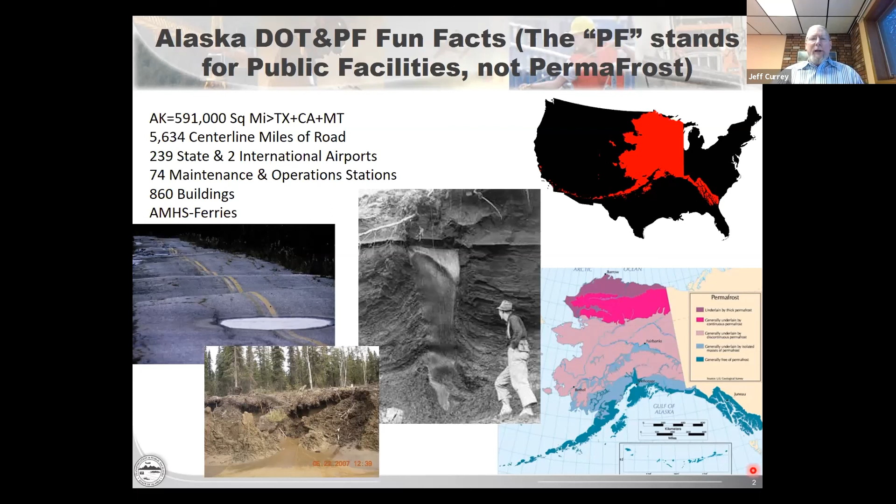Not just here's how you turn on the equipment, here's how you hook it up, here's how you interpret the data and the software, but also the local specific: these are the parts that get brittle when they get cold. This is what you have to do to keep your batteries functional. Very, very useful. And we've basically adopted it over the last 2 years. We've developed some checklists and guidance to train our new folks as they come on, and we're using this stuff.

The first technology we used is passively coupled resistivity. There's only one brand that I know of that makes this. That's a brand called OhmMapper. And it's resistivity. I like to think of it sort of as mobile ERT. You've got a transmitter, you've got a series of antennas, a bunch of coaxial cables of different lengths, and a processing unit. And you string this thing together, and then you can let it cook and just sit in one place if you want, but you can also drag it at roughly a walking speed.

You drag it behind a truck, you can drag it on foot. We've used four-wheelers. We've had good success using snow machines. It works well through snow. It works better in frozen ground than in thawed ground, so we actually get deeper readings than typically are found in the lower 48. It covers a lot of ground fast. That's the big thing, is that for doing linear projects like roads and runways, we can cover several miles in an afternoon. You have to make several passes on it, but it's still quite a bit quicker than pounding in a bunch of electrodes for ERT work.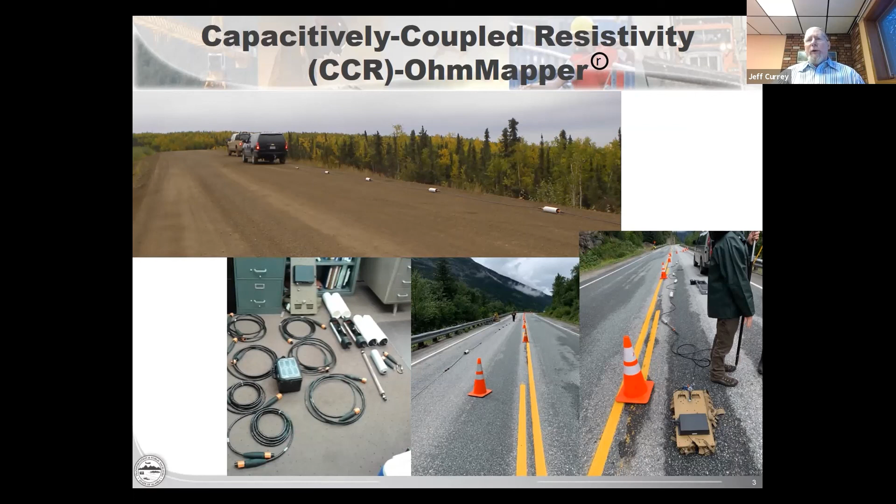Because it's so fast, we're able to do alternate alignments when we're considering moving a road or an airport to a new location. As it turns out, ice has an extremely high resistivity, and ice-rich permafrost, ice-rich frozen ground, also has a high resistivity, and of course thawed ground, wet ground has a very low resistivity. So we get pretty good contrast.

Here's an example of a project with ERT, with CCR data and drill logs. In our drill logs here, the black zone, that's our symbol for ice, pure ice. In this case here, where it's only halfway across, it's 50% visually speaking. But you can see that the borings that go into ice do reflect these high resistivity zones, whereas this thawed zone does not.

And this is one of the great things about combining geophysics with drilling. Normally you would have to look at this and say, okay, so we're in ice, we're in bad ground here, we're in relatively good ground over here. So where do we draw the line? Well, we could drill more holes to try to define where the break is, or we might just arbitrarily split the difference, or maybe be real conservative and put it over here. But this gives us the picture.

And in fact, we don't have any holes that are very close over on this end of the section, but we do have a very clear distinction between where the ice-rich permafrost is and where it's not. This is a big deal because we might decide to do some pretty exotic construction techniques to try to keep this ice-rich material frozen, and we don't want to do any more than we need to, so we can kind of optimize our designs.

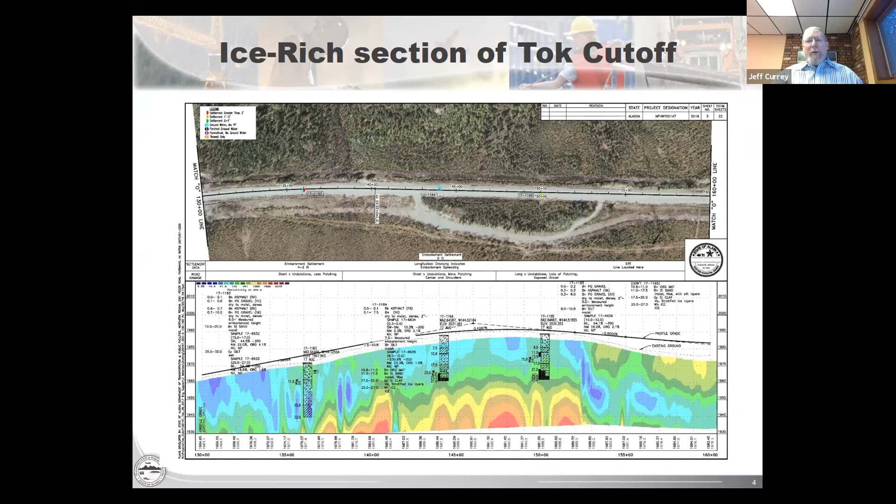The other technique that we use is ground penetrating radar. This is not terribly exotic stuff, but we've used it, and it turns out we use it even more often than our CCR work, which is primarily for frozen ground and occasional water tables, things like that.

Ground penetrating radar, of course, measures dielectric permittivity, so it's good for looking at different layers of materials. Voids, great for finding voids and culverts. It's good for identifying a water table. It works great through ice, and we actually use it for ice to confirm that ice is thick enough for us to run our drill rigs across when we're crossing water bodies.

It's great for measuring asphalt thickness with the right antenna configuration. We have places where, because of our settlement, we've got asphalt patches that may be several inches thick, maybe several feet thick, maybe tens of feet thick. And by using GPR, we can determine what the asphalt thicknesses are, which affects some of the different treatments we're able to do, or the construction techniques we're going to use.

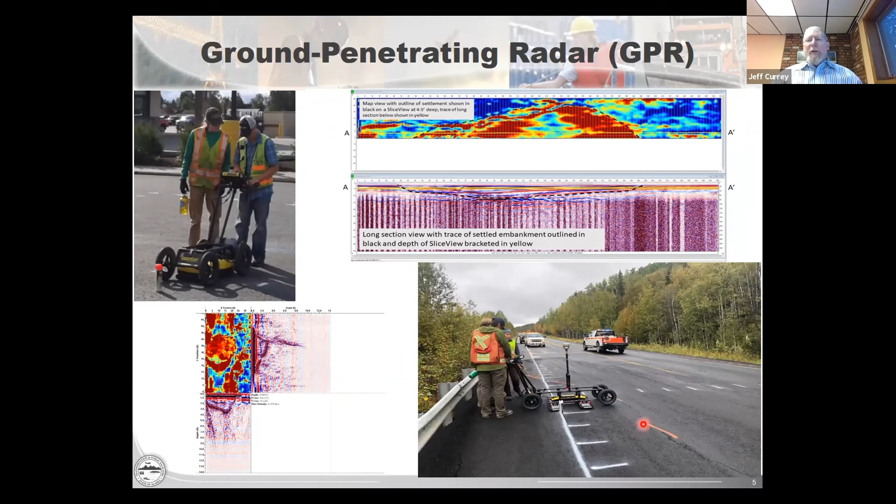We also use it for utilities a lot, for doing utility locates. We have urban settings where utilities are poorly documented. And so bringing our GPR unit out lets us find a safe place to drill in urban conditions. Now we take our GPR unit with us on almost all of our drill programs.

So here's an example of GPR, and this is the Nome runway in Western Alaska. It's a very complicated geology. The runway is built partly on dredge tailings, partly on virgin ground, partly over the Snake River, which was backfilled. It's got a lot of different conditions, and it's been built and extended at different times. And this pretty well shows some of the different properties.

There are drill holes that go with this data too, which is important. You don't ever want to rely on geophysics exclusively if you can possibly help it. But let's go through the benefits here. This is fast, and when we do either CCR or especially GPR in the field with our drilling program, Northern Region maintains the state of Alaska's in-house drill program. When we're doing that, inevitably there's some downtime whether the drillers are tripping out or moving between holes or servicing the rig or something.

So our engineering geologists can get out ahead of time and collect data and essentially add very little time to our programs. It's convenient. It all packs up into some Pelican cases or action packers. That means we can mobilize it out of a vehicle or out of a small aircraft. We routinely will do work for our maintenance and operations folks, do forensic stuff, and maybe we can do it in a day or even just an afternoon, or do utility locates for a construction project.